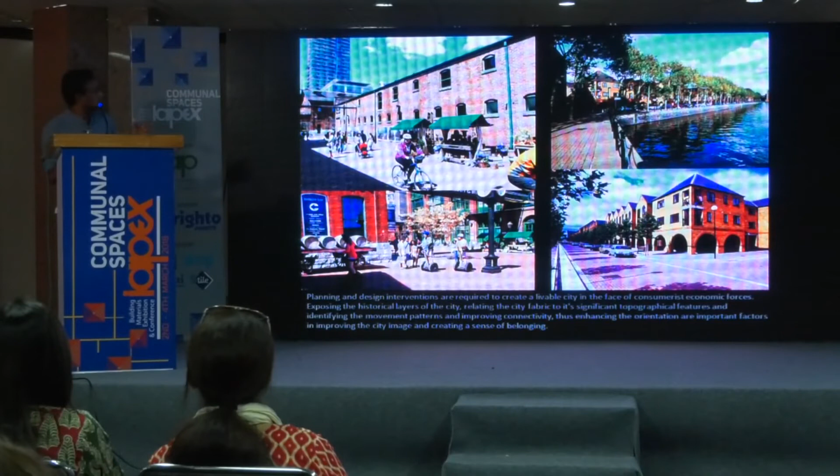So here are a few examples where all the industrial era buildings have been renovated and used for adaptable reuse. Sometimes you have to do very simple things, like creating a clean, nice edge, and maybe planting a row of trees, creating some shade, and relating yourself to the water, so that you create a sense of place.

After the end of the civil war in Sri Lanka, our Ministry of Defence, along with the Urban Development Authority of Sri Lanka, embarked on urban renewal projects. Actually, the Sri Lankan army was used for the construction, and this is one of the examples.

This is the old Dutch hospital, which was actually not used for anything important. It was converted into a space with restaurants, cafes, and shops, and this is in the middle of the heart of Colombo.

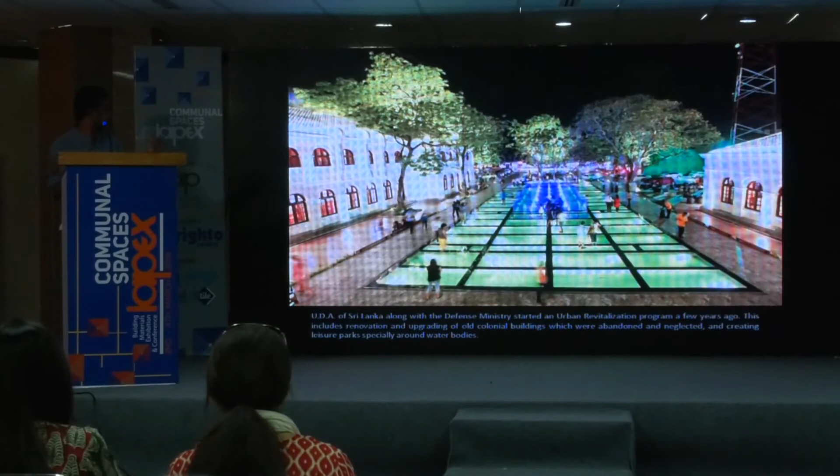This is again a set of old colonial buildings which have been converted into a nice public space, and all these were handled by UDA actually. There again you find restaurants, cafes, and basically shops. That is part of the same complex, it's the kind of entrance building to the whole complex.

This is not in Colombo, this is in Galle, actually in Galle Fort. It's an old Dutch fort, right? That's again a Dutch hospital building which has been converted into restaurants. That's the upper floor balcony, you look into the view of the sea, you can see the rampart walls. That's the interior of a shop in the same building.

This is one of the leisure parks which have been created in and around Colombo city. Part of the marshy land was converted into a lake, and you get jogging tracks and cycling tracks and all that. So in the evenings these places are full of crowds and they are very functional.

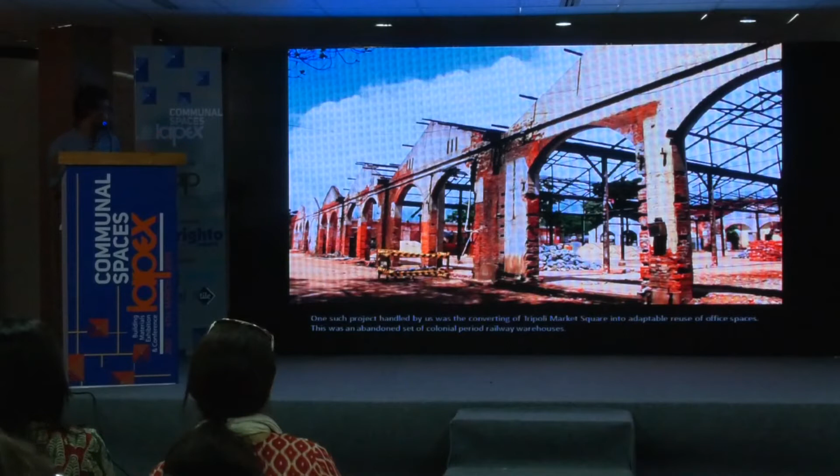So if I talk a little bit about the context of the whole site surrounding, we have our main railway stations of Colombo city very close by, the Maradana railway station there, the Maradana railway station and the Fort railway station, and actually it's the major transport hub of the city. The bus terminal is also there next to the Fort railway station, and it's close to the main commercial hub and the Colombo port, the harbour.

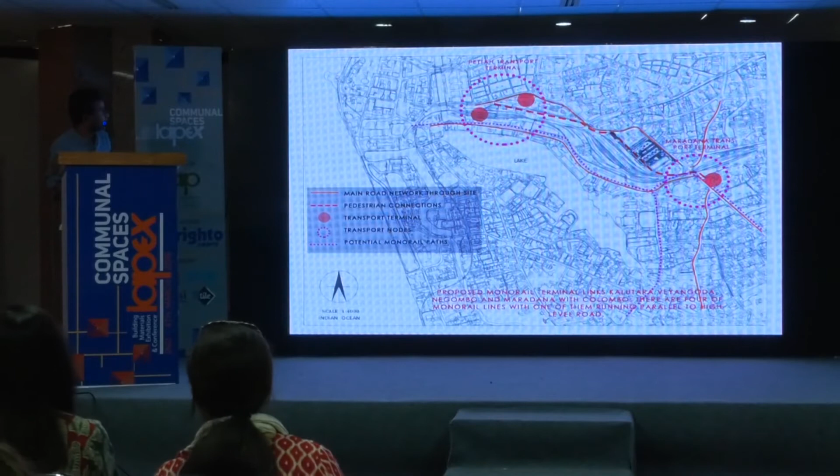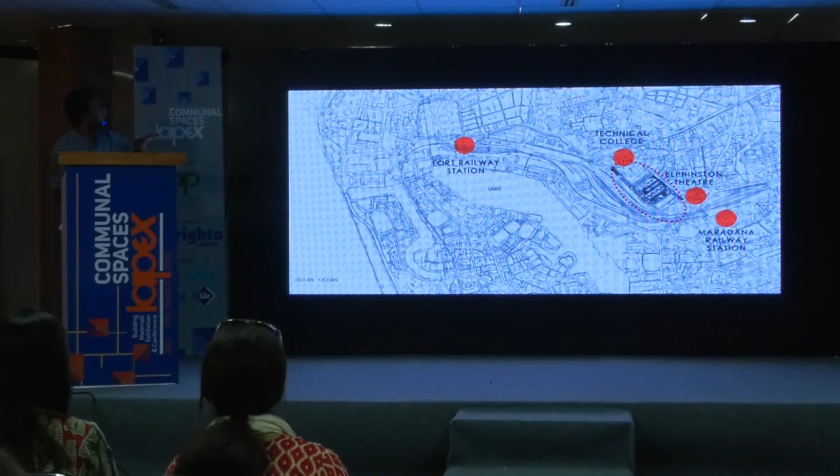We also have some important buildings with architectural and cultural value. The Fort railway station is also a colonial building, along with Maradana railway station, and Elphinston Theatre, a nice old colonial period building which is used for a technical college. There are a series of such buildings, and we get our port complex also close by, with many nice old buildings there too. So if we renovate all these buildings and revitalize the whole space, it will have a totally different look, right?

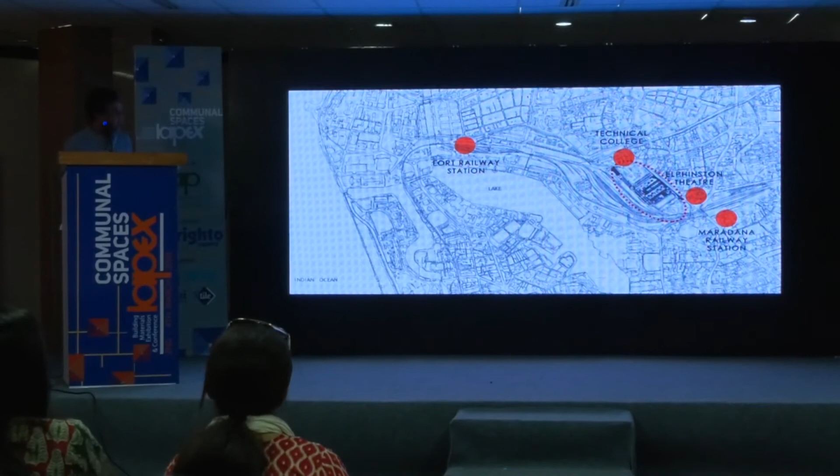Our site, of course, is the next one, that's the Google image of the thing. So you can see this whole thing is our site. It is one of the few green patches in the area. Basically, right around on one side you get a very congested, very dense, sort of unplanned development, 2 to 3 story buildings, and on this side you get the railway tracks.

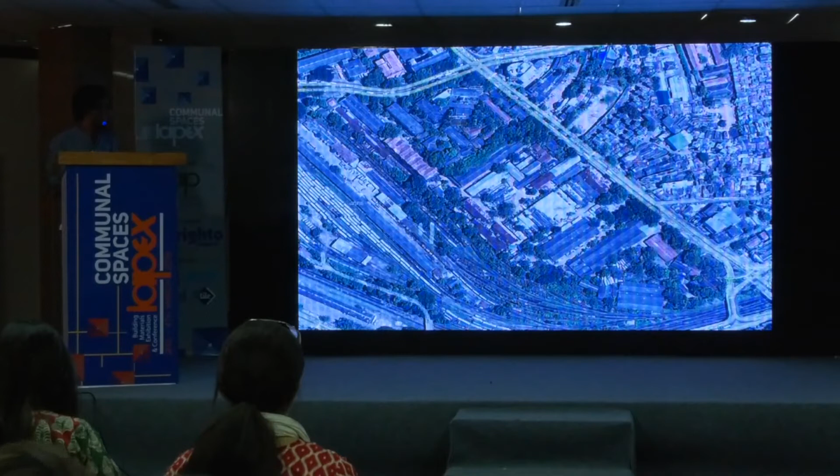So that's our site, with all the abandoned warehouses. What we thought was, because these are 2-story and single-story warehouses, we tried to create a green patch in the middle of the congested area as a sort of breathing space.

So that's the site, the green, and these are the high density development. And again on this side we get a little bit of greenery and the Beira Lake beyond that.

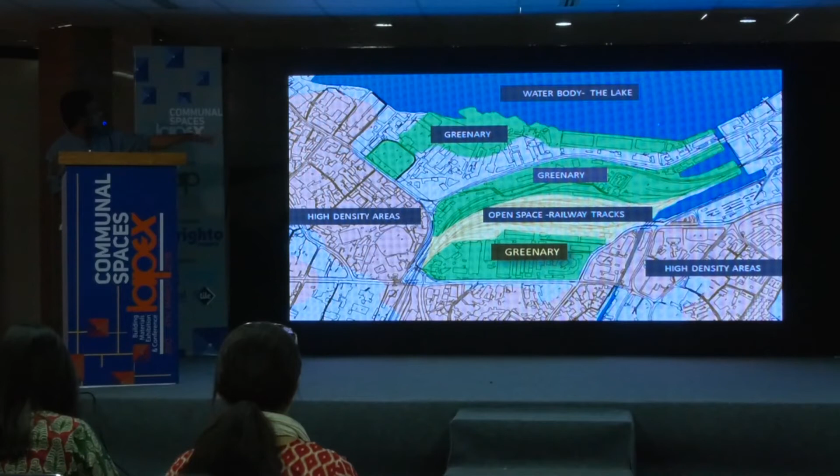Yeah, go to the next.

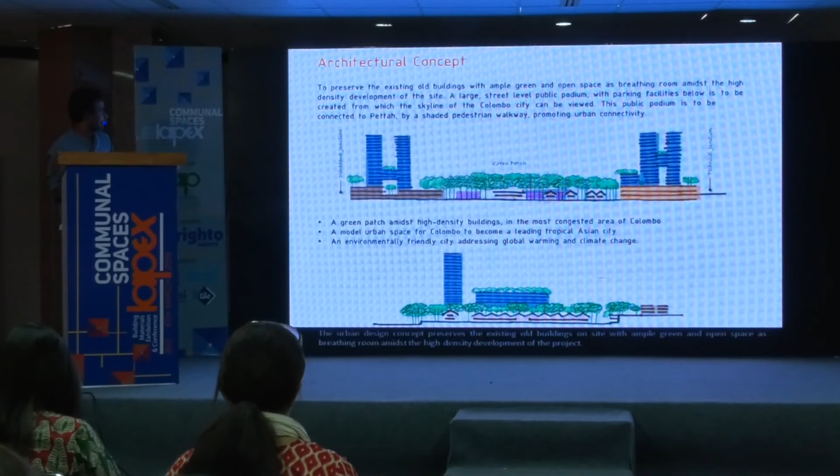So our site is actually about 20 feet below the road level, the access road level, and taking advantage of that, we created a nice public podium on one side.

There was a problem trying to preserve a set of single-storied and two-storied warehouses in an area where the land value is very high. So we suggested keeping the warehouses in the middle with the greenery and having some middle-rise developments on either side, to compensate for the low footprint of the single-story structures.

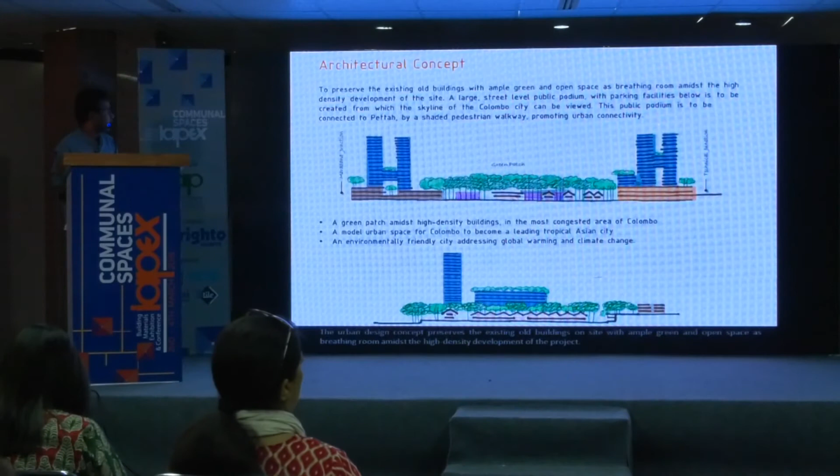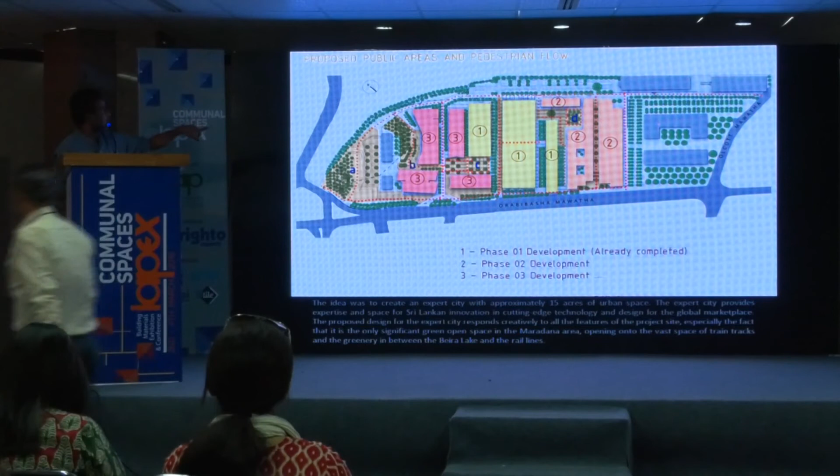Can you go back to the previous one? So in the middle, the yellow color buildings are the ones we have already preserved, the single-story warehouses.

And on this side, the building on the left-hand side, there are a few other warehouses, two-story warehouses.

If you are trying to incorporate modern structures of 2 to 3 story height, you create a bit more sellable space. There's going to be about 300,000 square feet of office space, cafes and various other activities, and parking for the office spaces.

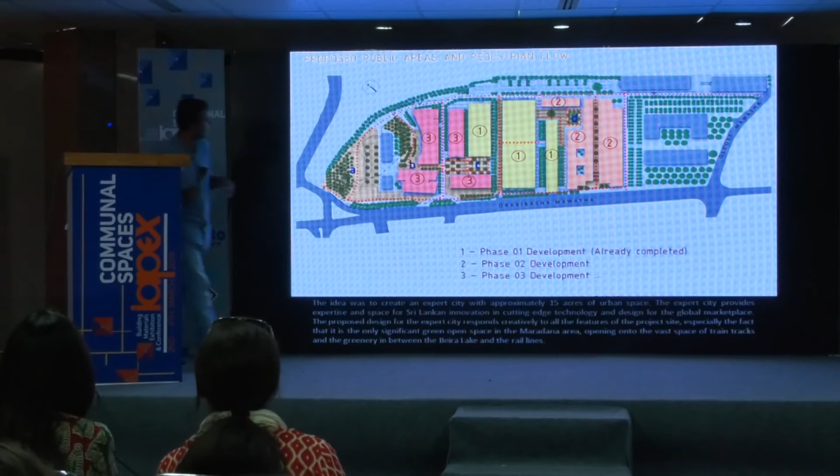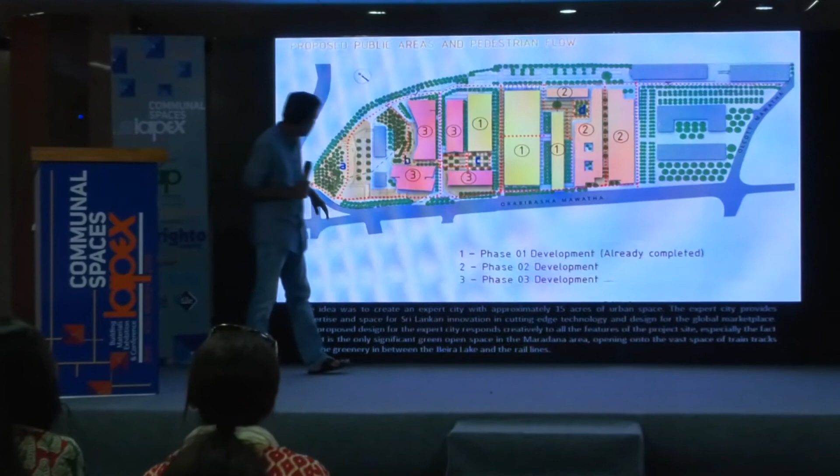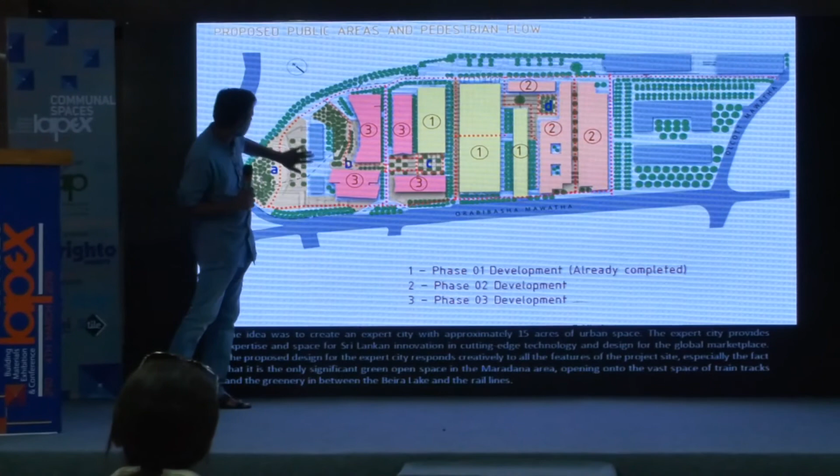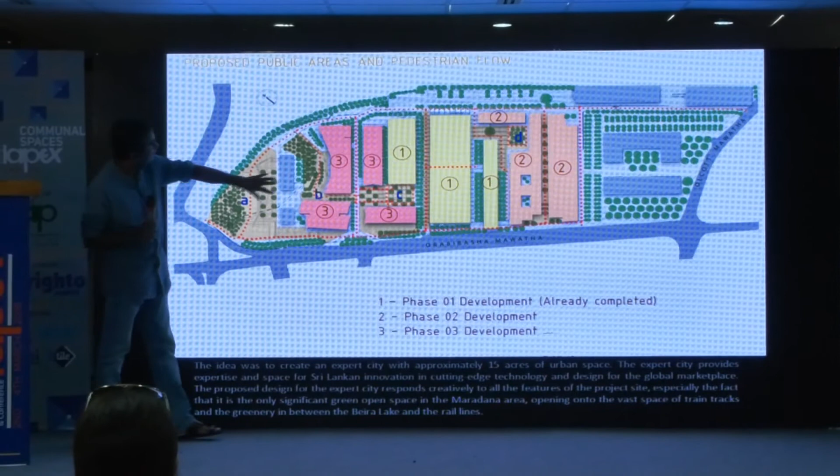So the significant feature of the whole complex is the public area in front, and we also have a series of public spaces in the middle. We are also trying to improve the connectivity and walkability of the area.

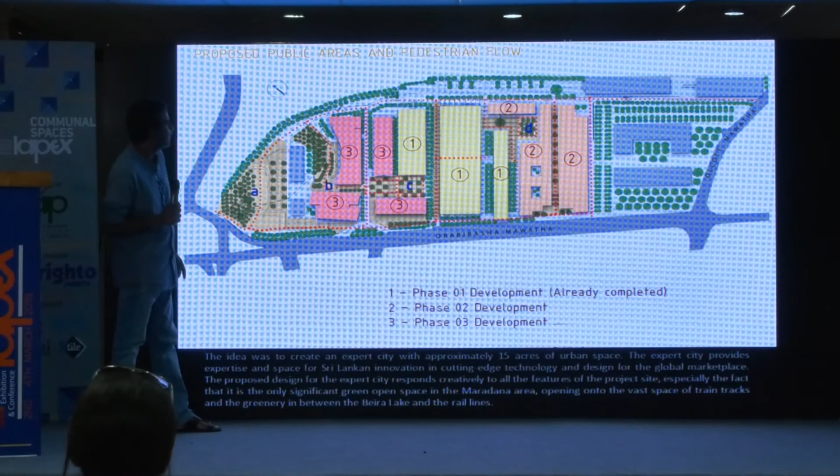We are trying to create a shaded pathway from the public podium to the transport hub of the city. So that is the basic layout of the plan.

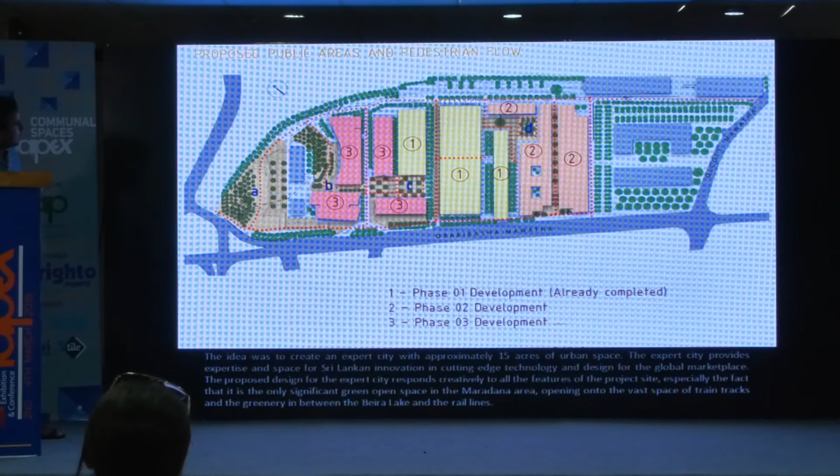What I will say, yeah.

So this is the renovated warehouses. Actually, you get the telecommunication tower coming up beyond the site, which is now near completion.

This is a picture taken about 3 years ago. Now the trees have grown up and they are much taller than this.

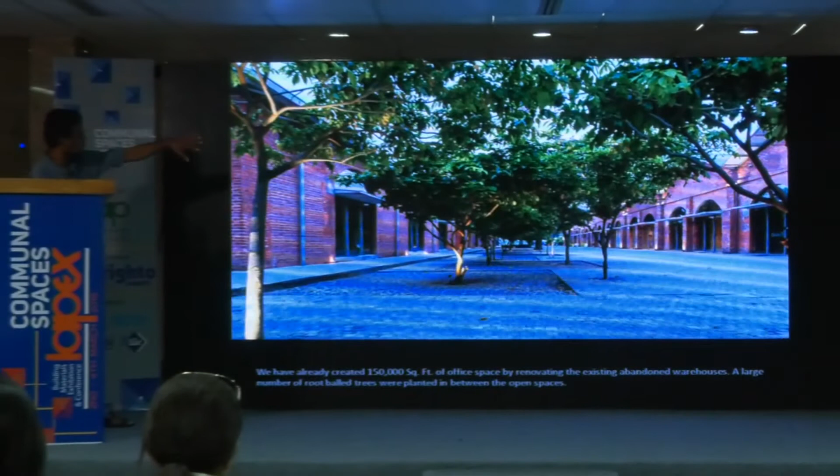So these are the trees, and that was the original British period warehouses. This one actually belongs to a later period, but we got the same sort of character in these buildings as well.

So those are the trees which we planted. Next one. This is a typical facade of a typical bay.

So that's the plan of phase 3.

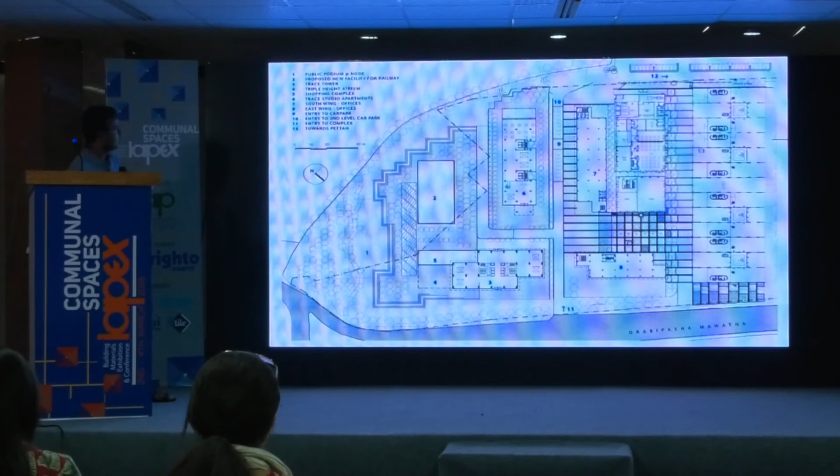Next one. We created a series of courtyards in alternative bays so that we could get light and ventilation into the office spaces.

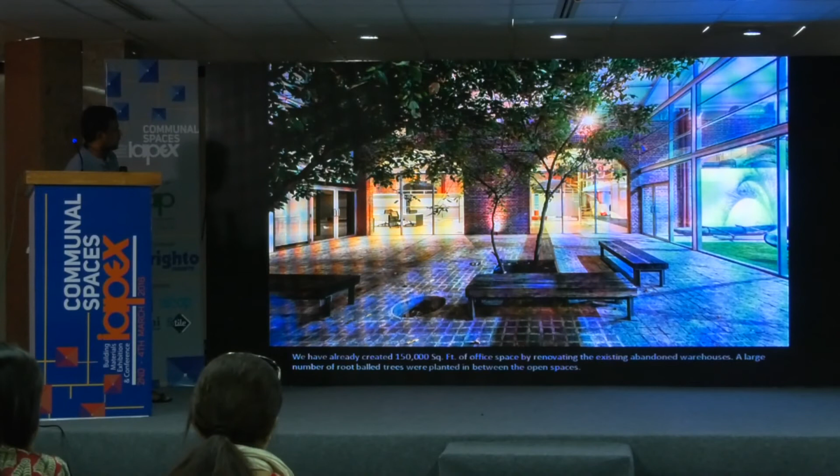And we planted some trees so that you are connected with nature, and it gives us a nice ambiance. Next one, this is the picture of the same courtyard.

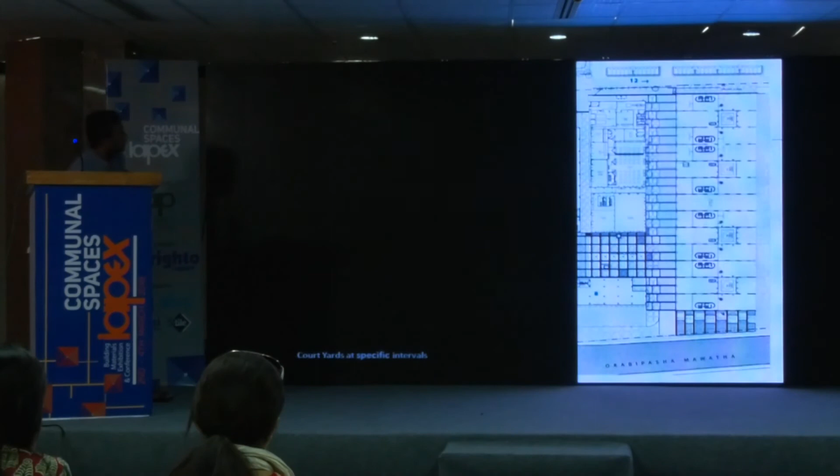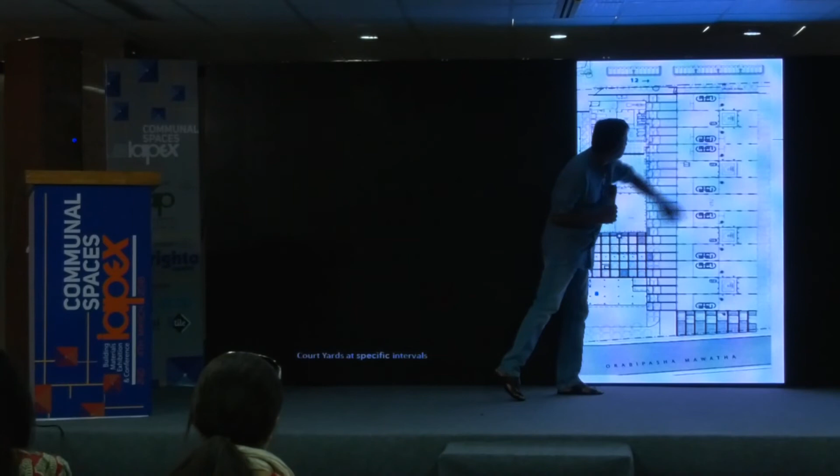So here, the new thing that we added was a mezzanine floor in alternating bays, and the toilet for the office spaces.

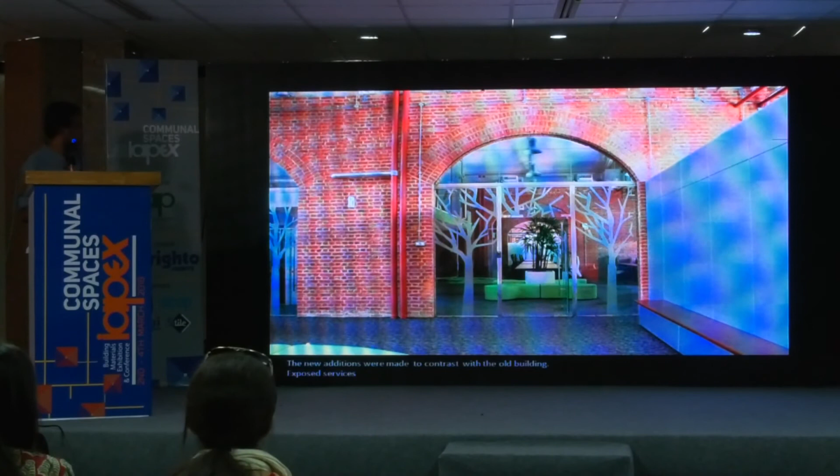That again is the interior. So, all the services we detailed very carefully so that they look as features added onto the old structure - the AC ducts and all.

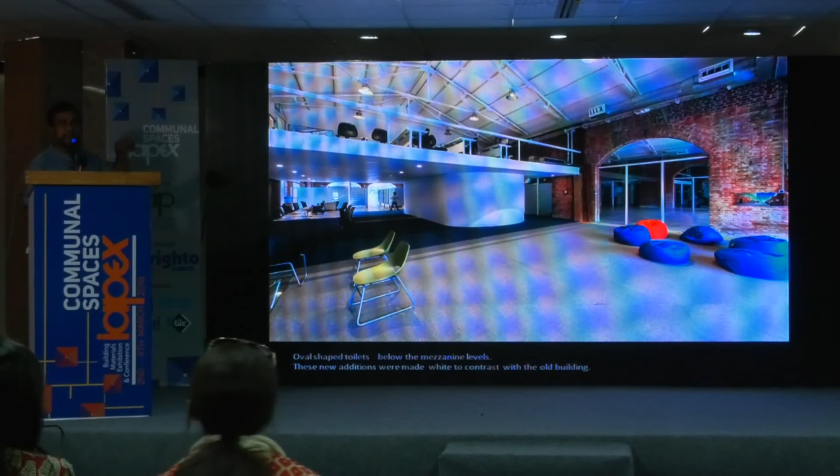And again, the office space, interior of office space. We didn't handle all the interior spaces, some other architects handled various ones.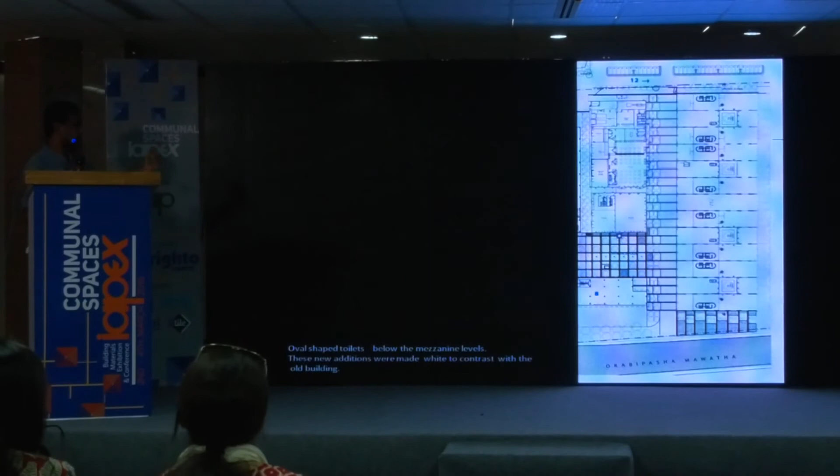Can you go back please? So that's the mezzanine floor and the toilets, the offices. So that is what we added actually. That's it.

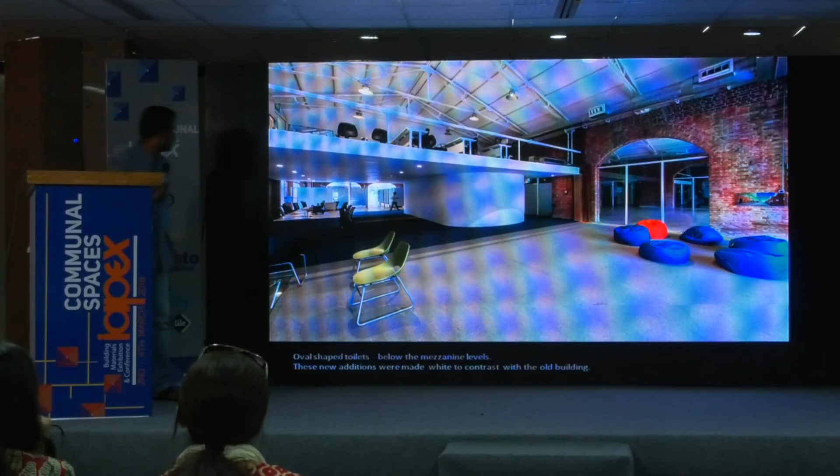That again is the interior space. You can see some partitions done out of metal cladding so that you get a sort of industrial character.

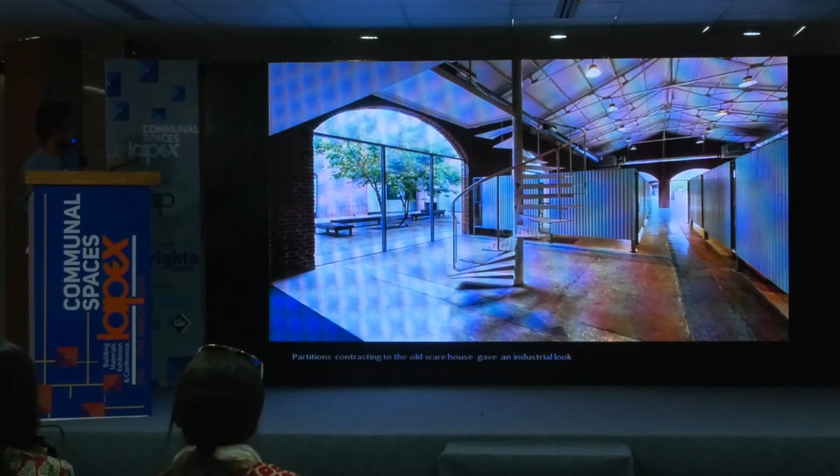Again, another office space. So that is the IT office, a picture taken from the mezzanine level. That was not handled by us.

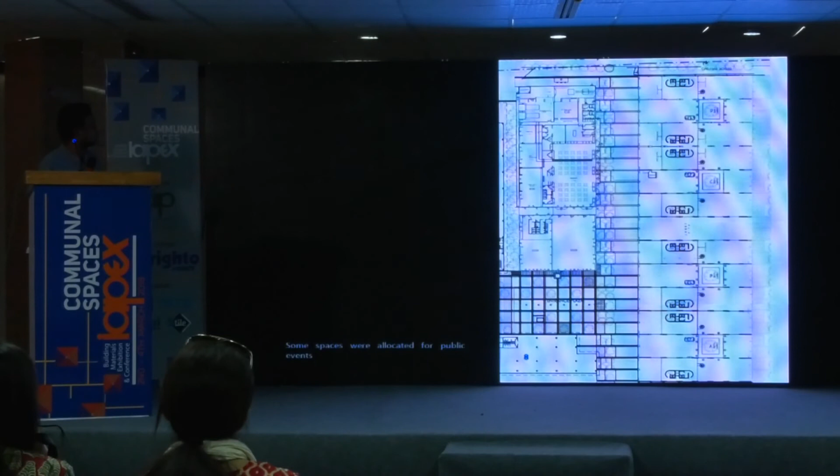There is a common area where public activities take place.

So this is some of the images of the phase 2 development which we have planned. That is at the approval stage.

So we have an abandoned 2-story warehouse, just one warehouse, and just the facade of 3 bays. We are trying to incorporate that into a modern sort of new office structure.

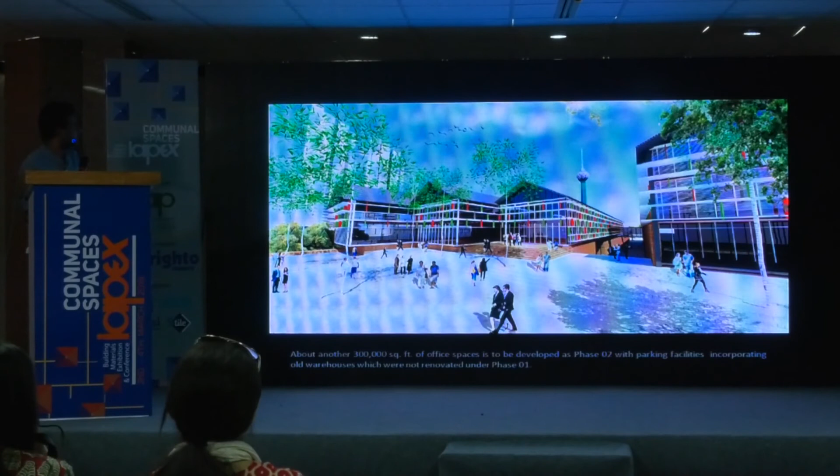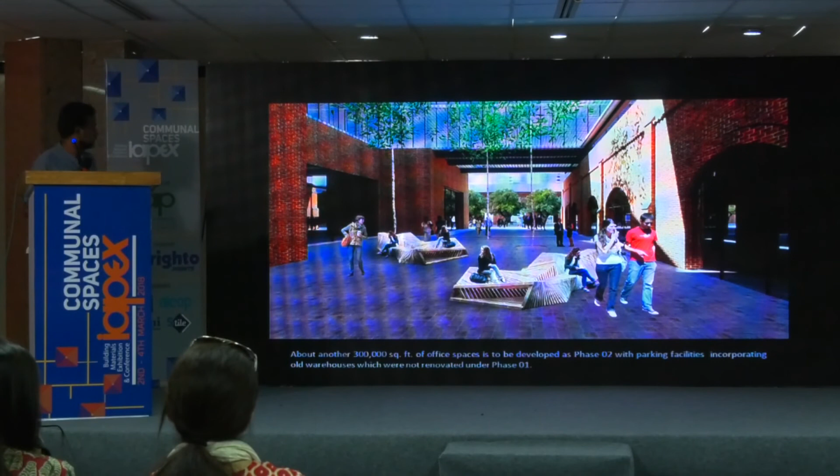That is the internal space of the internal courtyard of the complex. Those trees we have already planted there. So that is one of the courtyards.

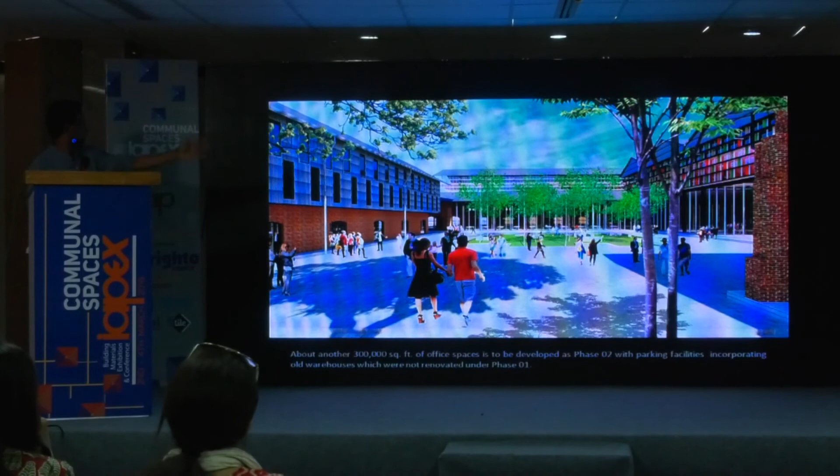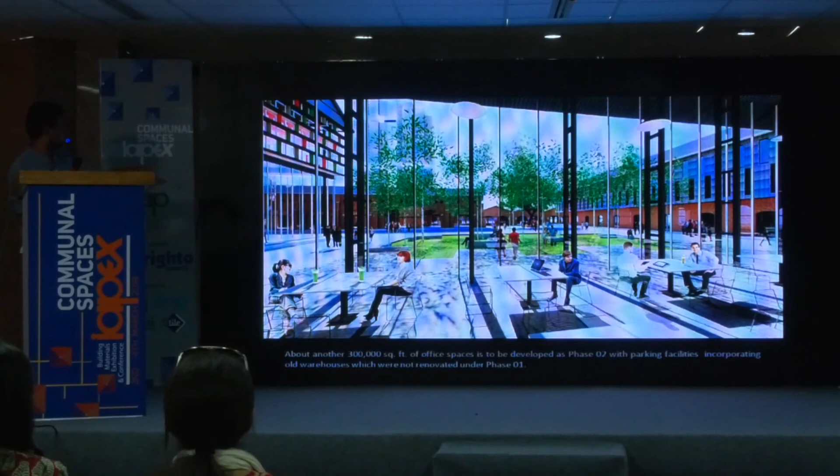This side, I think one side we... okay, yeah, that again is the same courtyard. The building that you see on this side, we have already completed this one and that one.

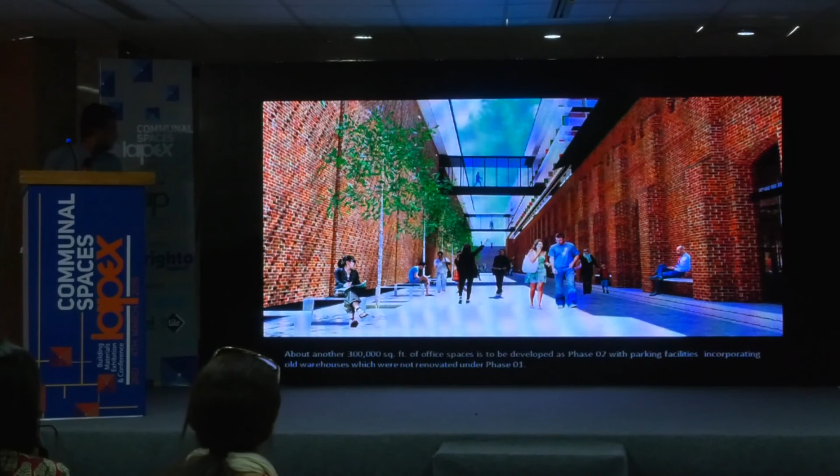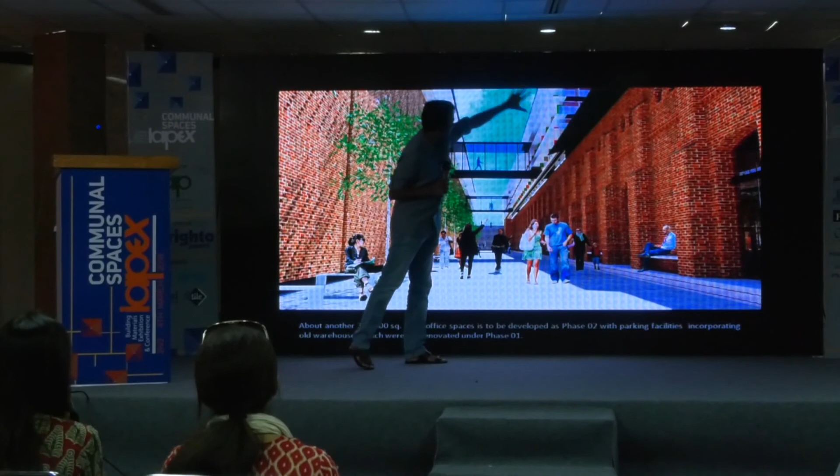That is part of the existing 2-story warehouse, and on top of that we are trying to add some lightweight structure for office space. Yeah, go back.

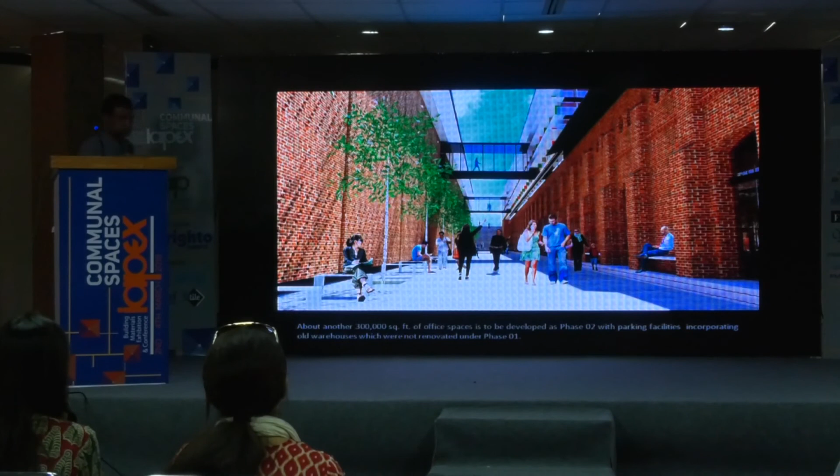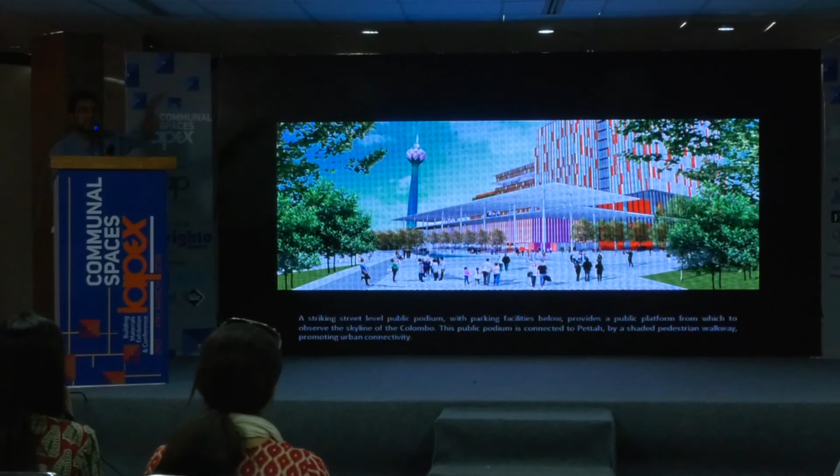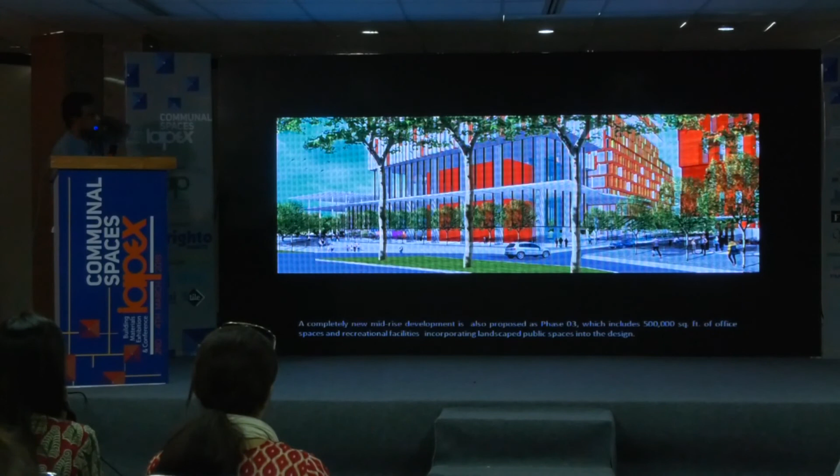That again is the vehicle access to the complex. This is a public space which is going to be the main public space in the whole complex.

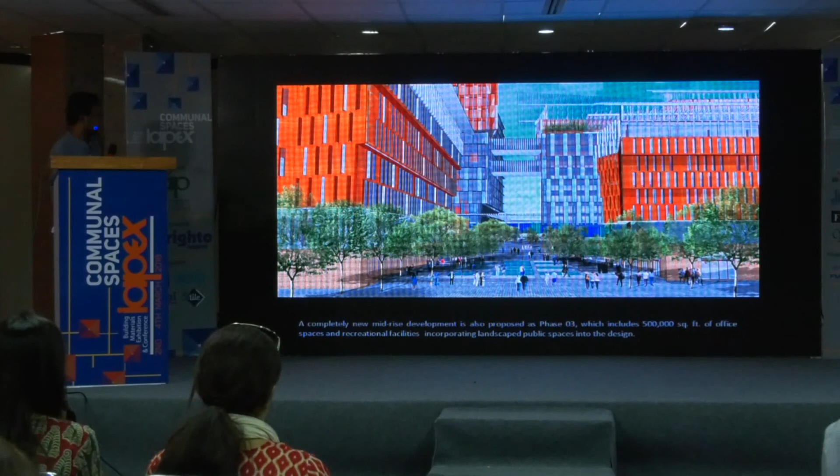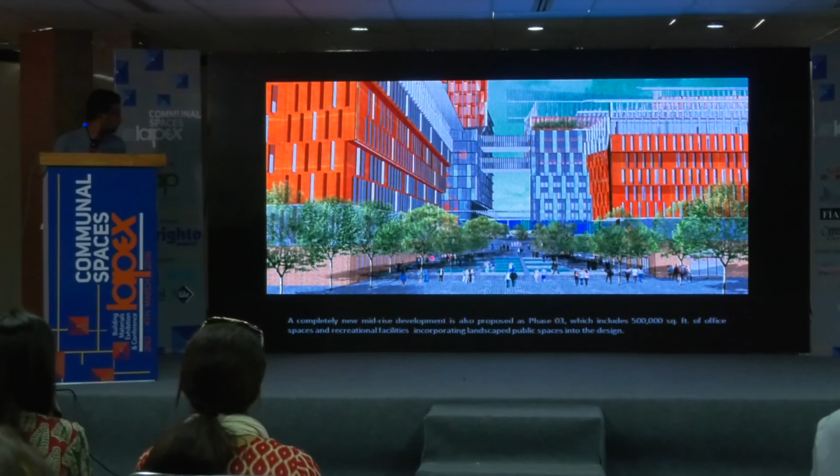These are actually already renovated warehouses, and the water feature is partly done. And these trees also have been planted, some of these trees on this side.

So we are trying to create the same ambience, the same character of the industrial period warehouses, and to capture the spirit of the place.

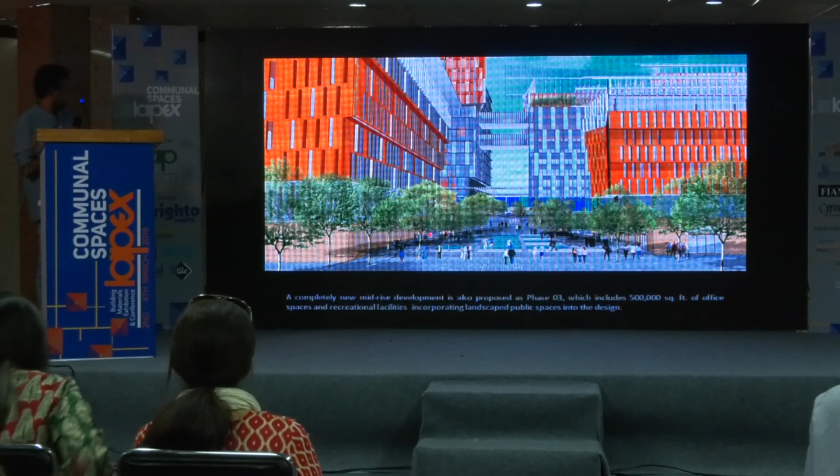Okay, yeah, that's all. Thank you.